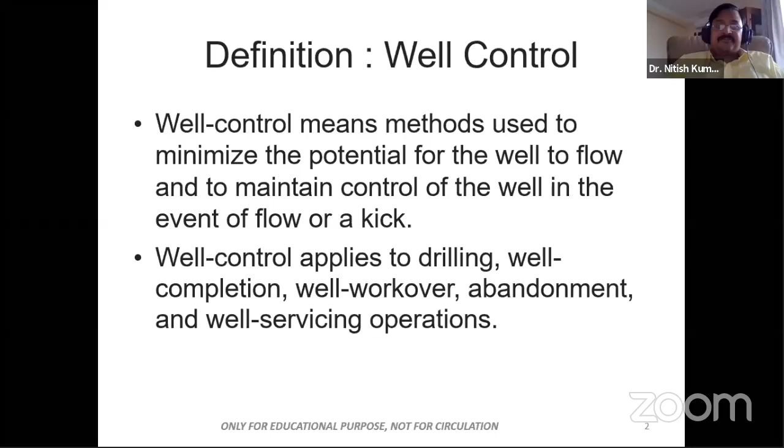All right, guys, so let us start the presentation with porosity and permeability. When we talk about flow in the formation, basically we're talking about two things. One is your porosity, which is the pore space, empty space in the rock matrix. That is empty space over the total space in terms of volume, and a good porosity, like a good sandstone in the Gulf of Mexico or Berea sandstone, might have a Darcy in permeability. Darcy is its measuring unit.

Porosity is purely by percentage, but when you talk about permeability, the unit is Darcy, and flow is in the pore spaces which are connected. Connected means they have the ability to flow from one pore to another, and that is measured in Darcies or millidarcies.

In Gulf of Mexico, one Darcy is not a big surprise for that kind of sandstone. But in the KG Basin, offshore India, you're talking about a couple of millidarcies. So which one will flow more, a Darcy or a millidarcy? Obviously it's the millidarcy which will not flow, so it's not a good reservoir rock.

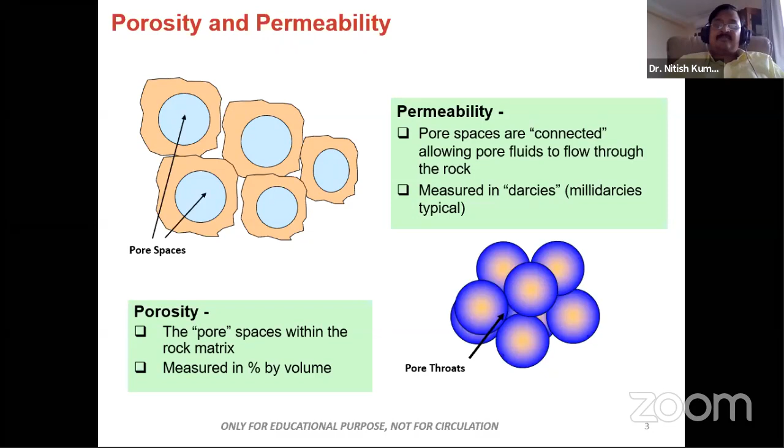Overburden effect. What is overburden? It is simply the pressure exerted on the formation at a given depth due to the total weight of rock and fluids above that depth. You can have very high overburden stresses because as you go deeper, the total weight of rock above that depth is much more than at shallow depths.

If you're talking about wells in Gulf of Mexico, where depth can be as high as 25,000, 30,000, 33,000, or 35,000 feet, you will have much higher overburden stress. But if you go to Malaysia, where wells are comparatively shallower, or North Sea, Norwegian continental shelf, 10,000 to 15,000 feet wells, the overburden stress won't be as high.

So you measure the density of the formation in terms of specific gravity, and also you can talk about it in PPG. Usually we talk about pore pressure in terms of PPG. That equivalent overburden stress for the rock can be almost 19 to 21 PPG.

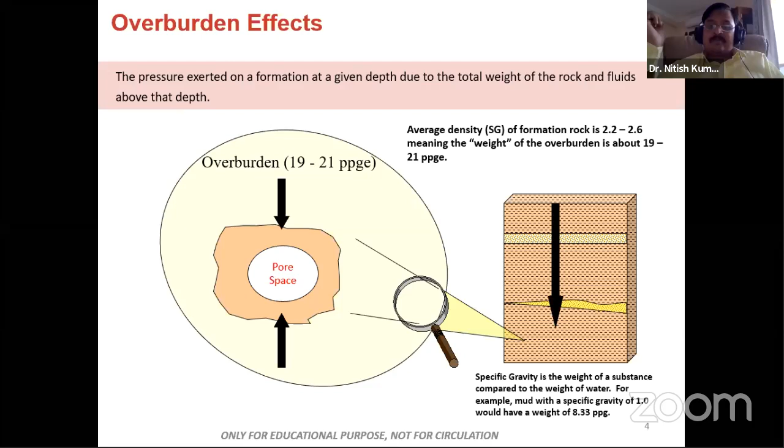Moving forward, let's talk about pore pressure. It is the pressure of the naturally occurring fluids within the earth. What causes a rock to have all that pore pressure? There is a rock, and if it's a reservoir rock, there would always be some kind of containment to that rock. But it is the overburden load on the reservoir which really holds that fluid inside the rock.

So you can have three different kinds of pressures for the rock fluid. One is the normal formation pressure, which is simply the water present in marine or seawater environment to that depth. So if you're talking about seawater weight of say 8.3, 8.33 ppg, to a depth of 10,000 feet, into 0.052, into 10,000, whatever it is, that's the normal pressure.

That is normal. Then there is a category of subnormal formation pressure, which is pressure that is less than the corresponding pore fluid hydrostatic pressure. Why would you have subnormal pressure? There are many situations, and there are reservoirs worldwide where you can have subnormal formation pressure, 6 ppg, 5 ppg, that kind of reservoir pressure have been seen.

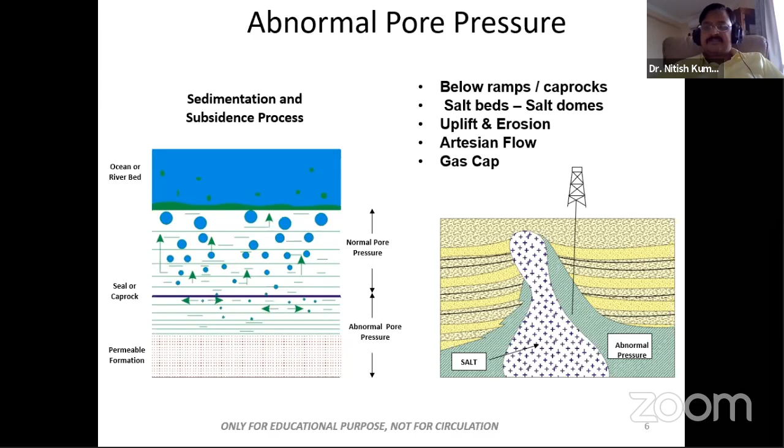All right, next is levels of well control. So what happens if there is a flow of reservoir fluid to the surface, like we said? And how many levels of well control would we have?

The first thing is the primary control, which is the mud itself, the drilling mud. As long as you have the drilling mud in the right way, with the right properties, you have the best well control fluid as the means for the well. That's what we call prevention.

And once this prevention is lost, you go underbalance, and the formation pressure becomes more than the hydrostatic plus the frictional pressure in the well. Then you will go underbalanced, and in that case you may need secondary well control.

And what is that? Something like the BOP rams, or the annular - you shut them in, and then you circulate out that kick, and you try to maintain your primary mud weight. If you're using the driller's method, maybe two circulations, or the wait-and-weight method, whatever method you use, you try to bring that overbalance back and get into the primary control zone.

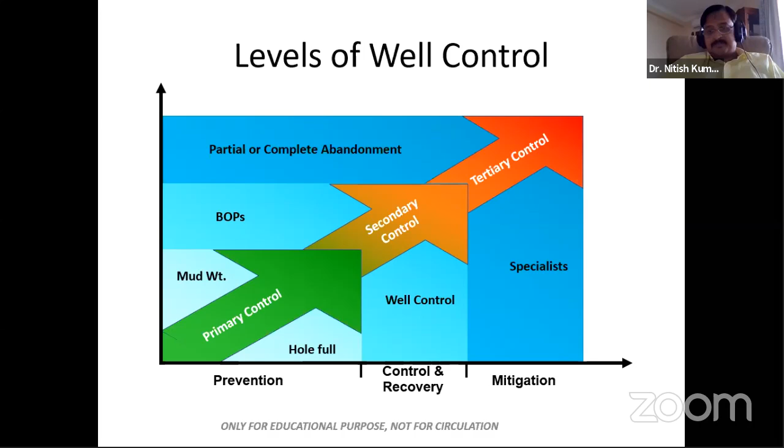Now I'll bring in a slide on well integrity and well barriers. The reason I bring in this topic is that well integrity is a very detailed subject, and those in the field do realize that when they put together drilling programs, we try to maintain at least two barriers, two well barriers in place, and the well barrier is made of various barrier elements.

Now you can see in this schematic there's a reservoir, and we are having a directional sort of well here. So there is the reservoir, and to some extent this casing is a barrier, but as it comes out of the reservoir in the hole, this blue casing is your primary barrier.

And as you go further up, you see another barrier. This is the red one, the cement behind in the hole, and that's the secondary barrier. Further up, you have this cement all around, and you have your BOP, your well control equipment as your barrier element, and together all this is your secondary barrier.

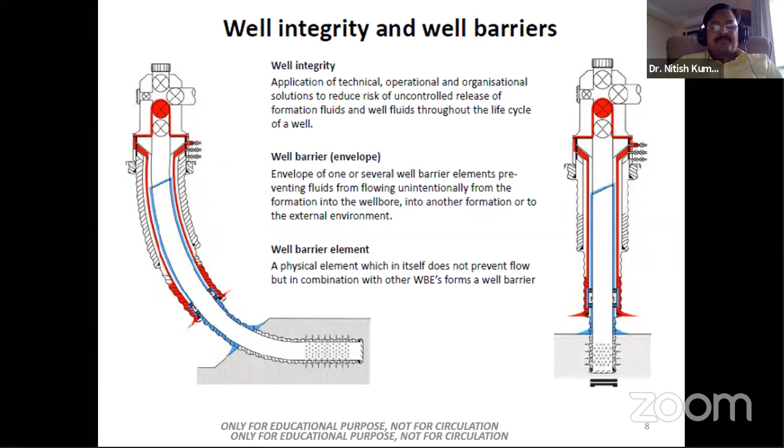Now, why I said initially - there are special situations when you would allow the same barrier element to act as the primary as well as secondary barrier element. This is more in the completion phase, where there are whole detailed analyses and studies in this area of integrity. Here we'll just touch on it from the perspective of drilling, and we're talking about drilling mud basically. So my next slide is about barrier element acceptance criteria.

Now, fluid column - as you know, fluid column is a basic barrier element. This is coming from NORSOK D-10. When we talk about drilling fluid and drilling mud, you see design and construction selection. So in the design phase itself, you must ensure your well design is such that the hydrostatic pressure shall at all times be equal to the estimated or measured pore reservoir pressure. That's exactly what we plan as drilling engineers. We try to have a safety factor there, but as engineers, we can only plan, guys.

When we go in the field, and we drill with a specific hydrostatic pressure, and we hit a big ramp which we had not been able to predict geologically - what would happen? We'll end up in a well control situation because we are going to take a kick. Once you have taken a kick, that is the purpose of the discussion for this presentation.

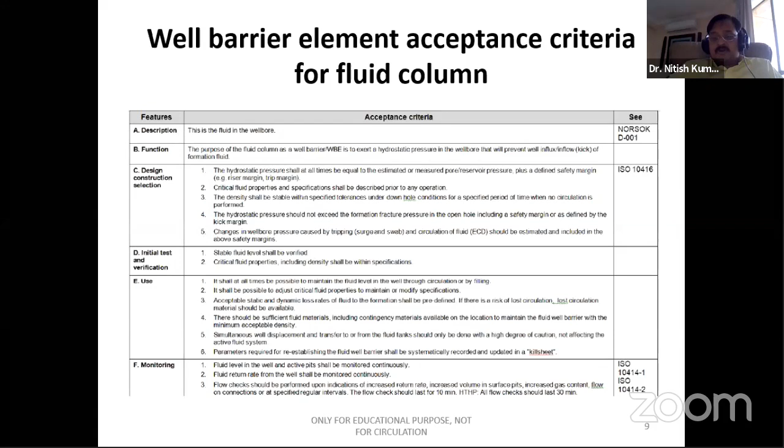Moving forward, guys, so we talked about swab pressures. So what is swab? It's a piston effect when you're tripping, trying to pull your bit out of the hole. This causes a decrease in the well pressure, and if that decrease is significant, what can happen? You may end up in a situation when the reservoir fluid will start flowing.

Now, if the reservoir fluid influx happens, you have taken a kick, and that's something we don't want to happen in drilling operations. But you will see that in theory, to discuss swab pressure or surge pressure, I'll discuss that as well. But this is very important.

From swab and surge pressure perspective, I would say that the operators on the rig side must be aware of the impact. We'll see in one of the well cases how careless we can be in situations.

So, talking about surge pressure, it is the piston effect of downward pipe movement. When you're going down, this piston effect happens on the wellbore, and if you don't have control on the surge pressure, you can end up fracturing the formation. At one end, you can take an influx, and on the other hand, it can be fracturing the formation.

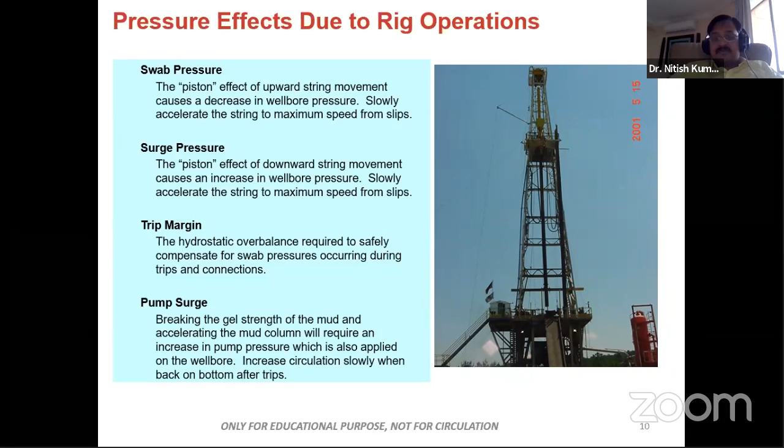So if you increase the circulation slowly, then you have better control on the pressure. Otherwise, you can break something down with the pumps. I will give you an example of this.

So what's happening here, guys? Just have a quick look. Your formation fracture pressure is at 5400 psi and pore pressure 4500 psi. So your bottom hole pressure should really be between 5400 and 4500. Now, what's happening? There are two cases here.

Let's talk about swab, and let's talk about surge. So for swab, you start pulling the bit, and when you're pulling, it runs very close to the formation pressure. What can happen? You can take an influx.

But on the other hand, you are trying to go in the hole with a lot of force, a lot of pressure. What will happen? The well will surge, and then you're getting close to the formation fracture pressure. In both cases, you have one outcome.

Now, in the swab case, when you were trying to pull the pipe out of the hole near formation pressure, what would happen if you switch off the pumps? The additional pressure from the pumps is also gone there, so you will lose pressure as well.

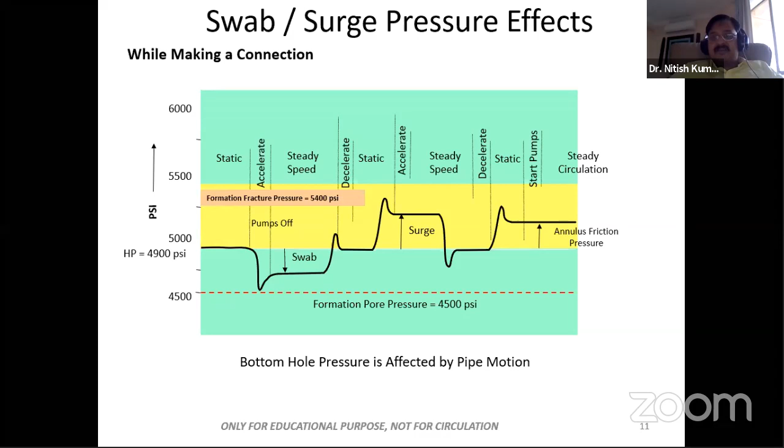Okay, so what is a kick? It's an unwanted or uncontrolled flow of formation fluid into the well. Uncontrolled flow refers to flow when... that's bad, right?

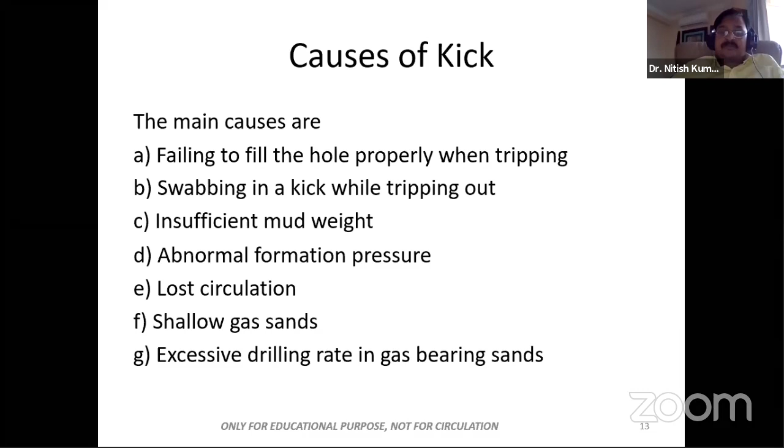Excessive drilling rate in gas-bearing sands. So you get all this drilling rate. There are D-exponent components, all kinds of equations based on your resistivity logs and whatnot, and they will give you a drilling rate, and there can be a drilling rate associated with it, which can be identified. These can be the causes of the kick.

How many kinds of kick indicators do you have? You have positive indicators when the kick is in progress, when you're drilling, or you have signs of approaching balance, underbalance. So let's discuss quickly these during drilling and during tripping indications that a kick would show.

Note that when the flow rate increases, that's a definite indication of a kick. When pit volume increases, that's a definite indication of a kick. Pump pressure decreases, pump stroke increases — note this. Pump pressure decreases, not increases. Pump pressure decreases and pump stroke increases, you will have a kick. So these are definite situations you can face. There are several IWCF questions based on very basic understanding of indications of a kick. When the pump pressure decreases and stroke increases, you have a definite kick.

While you are tripping: incorrect hole fill volume. Why would that happen? You will have an incorrect hole fill volume if there is influx. If there is influx, what would happen? The well will start flowing. Hole keeps flowing between stands. So you're trying to make up connections and the hole is flowing. What does that indicate? It is a definite sign of a kick in progress. And this is when you're running in.

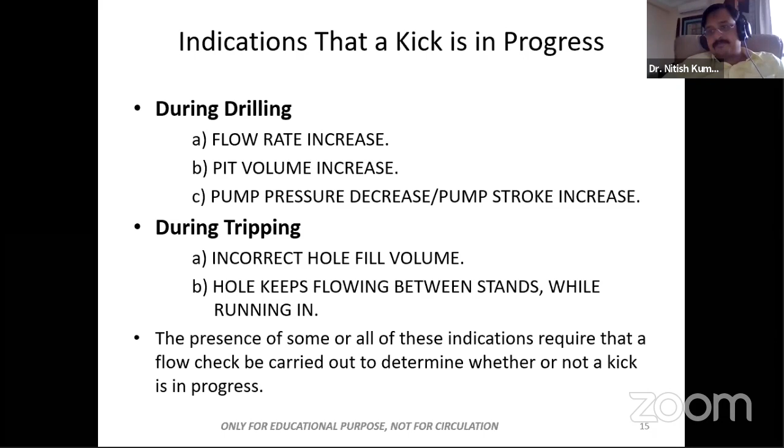Presence of some or all of these indications requires the flow check to be carried out. So guys, what is our solution? If we have a positive indication of a kick, what is the solution? What should be the first thing a drilling supervisor or a driller should do? You should stop drilling and you should go for a flow check. But I'll give you examples and you will see they didn't do a flow check, or they did a flow check when it was not required. We'll talk about those.

So talking about indications of approaching balance. When you say approaching balance, guys, or rising formation pressure, that means the kick has not really taken place as yet. The kick is not in progress, but a kick can happen if you do not take preventive measures.

Drilling rate — if there is a drilling rate, that means the formation is changing. Like we said earlier, a drilling rate is very useful to identify change in formation and is usually associated with change in gas, background gas, total gas.

Torque and drag, fill on connections. Well, what does it mean? What would happen if you go underbalanced? You will take a kick when you go underbalanced, right? So what would happen if you go underbalanced, and if there is a shale formation around you? Because the shale has that property of taking the water content from the mud, it will start swelling and it will behave erratically. It doesn't have enough overpressure to counter it, and then you will see that the torque and drag will increase.

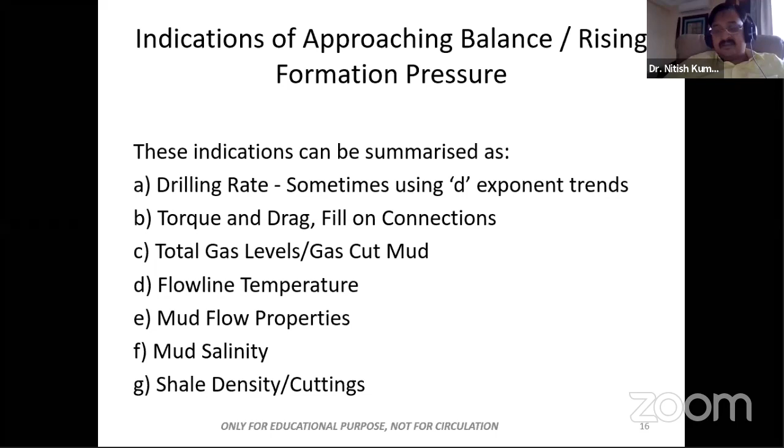Shale density, cuttings, cutting sizes - sharp cuttings versus what kind of density of shale you get. All these are just defined as indications of rising formation pressure.

All right guys, so you know what a kick is. You know now that you have taken a kick, what is your option? Your option is you have to kill the well, right? How are you gonna kill the well?

Basically, most methods try to put constant bottom hole pressure, and here we will discuss driller's method and wait and weight method. There are many other methods, not many, but two or three more methods - circulation is one, and you can strip down if you need to. But over here we are just talking about the very basic ones, driller's method and wait and weight method.

The principle, if you think of the well as a U-tube, is that formation pressure you want to keep constant is the sum of hydrostatic pressure of mud in the drill pipe. It's important that the pressure is measured on the drill pipe side. Why? Because the drill pipe side fluid will not be contaminated, right? Plus the shut-in drill pipe pressure - that makes your formation pressure.

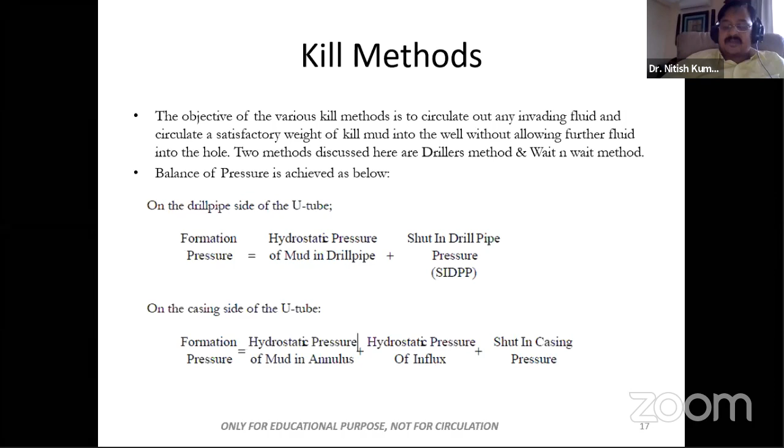On the casing side of the U-tube, what do you have? You have hydrostatic pressure of mud in the annulus, which would be of lower density than what you had in the drill pipe, plus the hydrostatic pressure of influx, whatever influx you have taken, plus the shut-in casing pressure. So you can come up with the formula for kill mud weight based on these two concepts, and we can skip that for now. I will just go and talk about driller's method and wait and weight method.

So the best part of driller's method is circulation begins immediately. The first thing is let the influx be circulated out of the well with original fluid weight. The initial circulation pressure must be held constant during the first circulation.

Then for underbalanced kicks, a second circulation is required. Why? You will need to know the kill mud weight and then circulate it around the well so that you can get the original well control, the primary well control, with the drilling mud. And if there is a mechanically induced kick, then you don't really need a second circulation using a driller's method.

So what is the good thing about driller's method? Immediate circulation, and the barite supply is not required to begin the procedure. You don't have to wait for anything, you just go and start your circulation.

Disadvantage: what would happen when you circulate with an underbalanced mud for a long time? There is influx pressure, and there would be a second round of circulation with the kill weight fluid, and that means the well will be under pressure for a longer time on choke. That's a disadvantage, right?

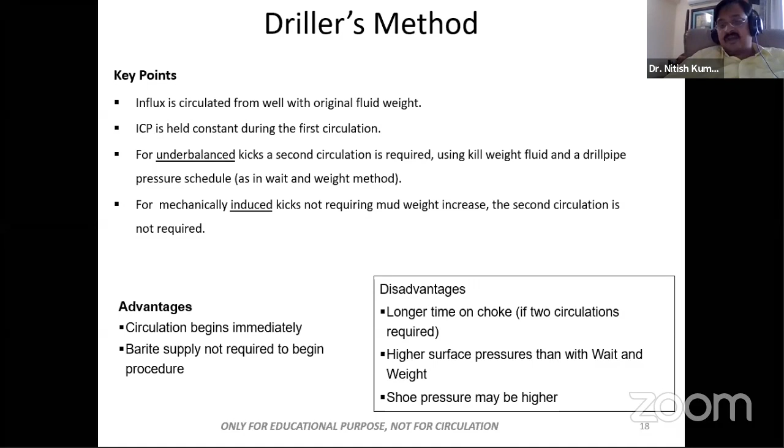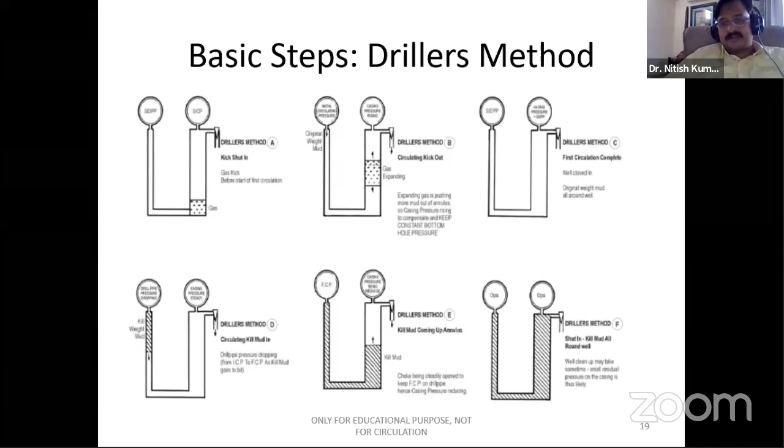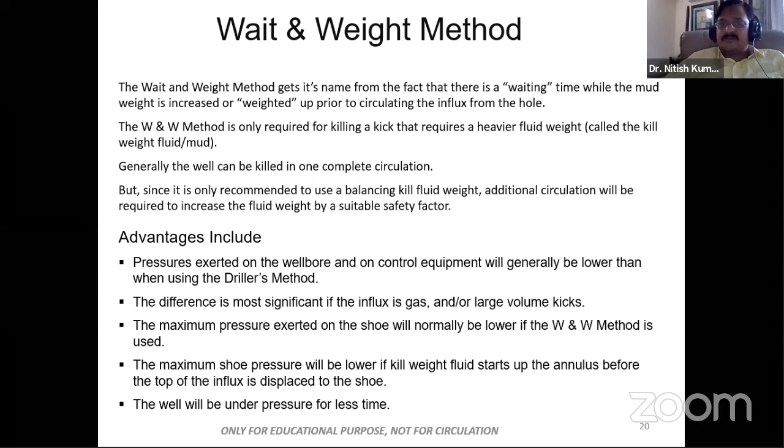All this is basic concepts, guys, no big concept. I'm sure you're aware of the driller's and wait and weight methods. Now let's talk about well control incidents.

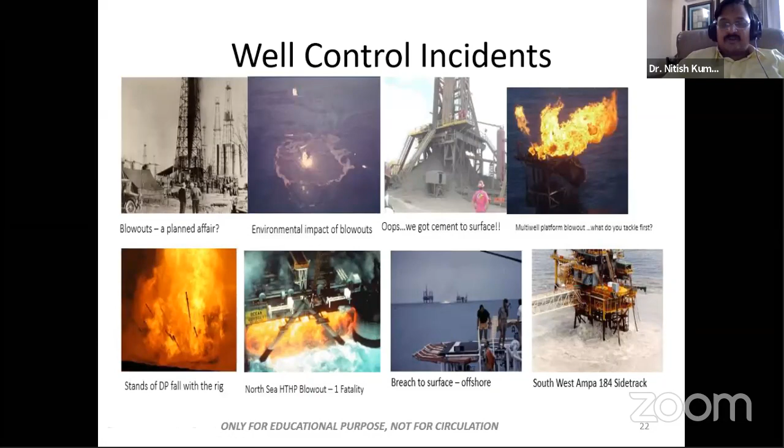Well control incidents happen, guys, and this is the reality of the oil field. We need to be very careful in our designs. Good engineering decisions on the rig side - only then can these incidents at least be prevented from happening.

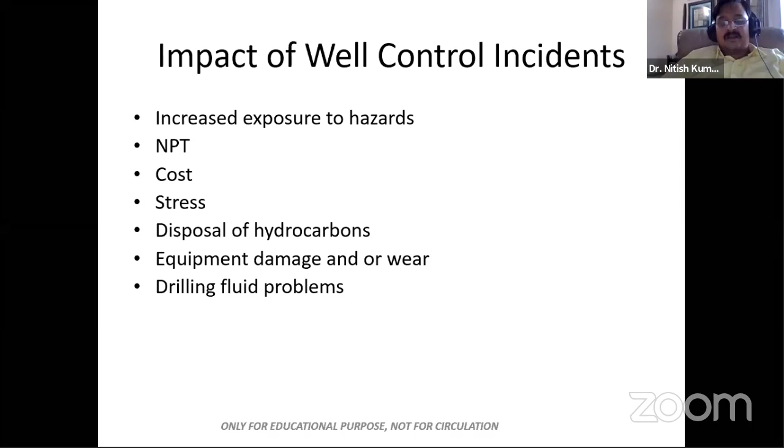So what are the impacts? Increased exposure to hazards, NPT costs - you know all this, I'm not going to waste time here. I'm told I have 1.5 hours only, and 45 minutes is gone already.

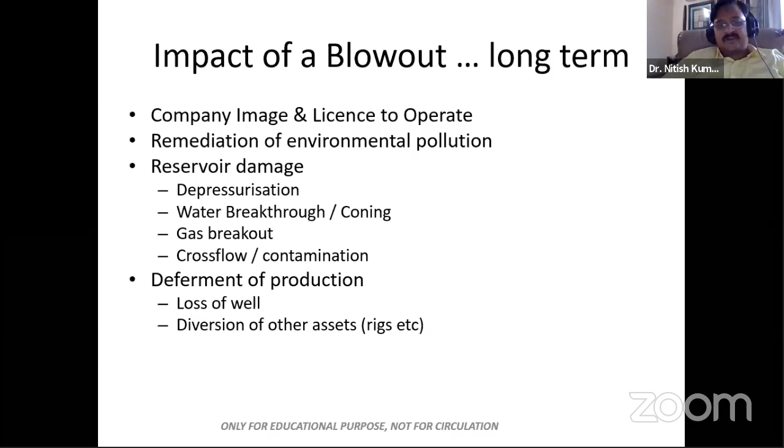So impact of a blowout: long term company image at risk, remediation, environmental pollution, reservoir damage - you depressurize the reservoir, whatever - deferment of production, loss of well, etc.

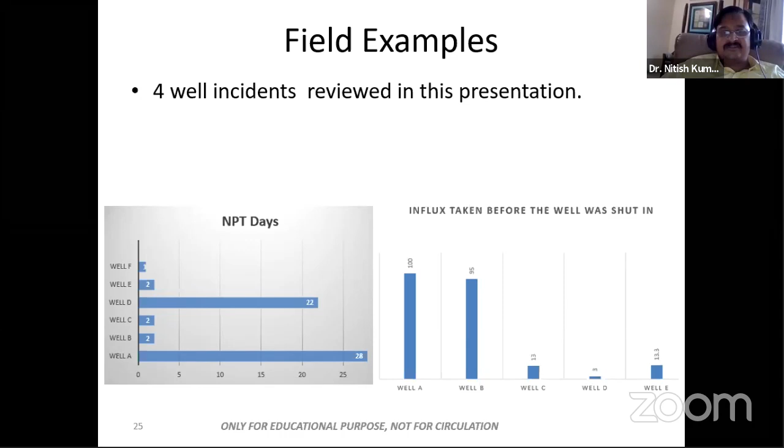Whereas on others you had just 3 barrels and you were able to shut in like this. So you need to have very agile minds. You need people on the rig who are able to take quick decisions, understand the well, talk to the well, and make the right decisions at the right time.

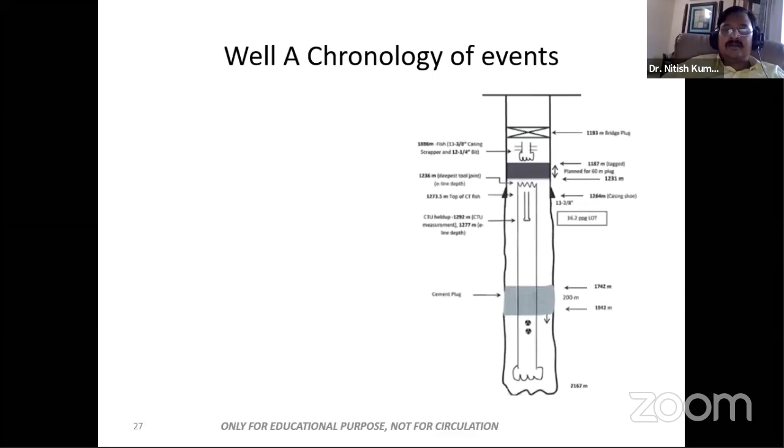Let's go to the well and the different situations we run into. So this is well A - I just named it, the operator is not identified. Here is a well, 2167 meter TD, and we were drilling in MPD mode.

For those of you who don't understand MPD, it's managed pressure drilling. It's just one way to have better control over the bottom hole pressure. The main purpose when talking about a kick is to have good control on the bottom hole pressure - this tool really helps us.

Just like you will have a pump on the rig, the MPD also has its own pump, and it puts an additional pressure on the well, and by that it minutely controls the pressure on the bottom hole. We were drilling a 12 and a quarter inch hole, with 11 ppg synthetic mud at the depth of 2151 meters. Now you observe the circulating background gas increase from 0.1 to 1.8.

Now guys, what does that mean? If you are observing an increase in background gas, is it really a confirmed sign of taking a kick? No. We know that this means the pore pressure is increasing, right? From 0.1 to 1.8, you definitely need to start observing the well.

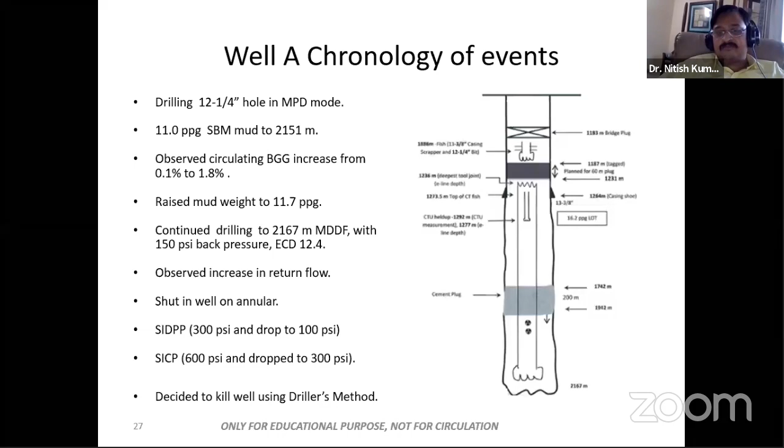So what is our observation? Increase in connection and background gas was observed. The well was not flow checked. Didn't I tell you the first thing you should do is flow check the well?

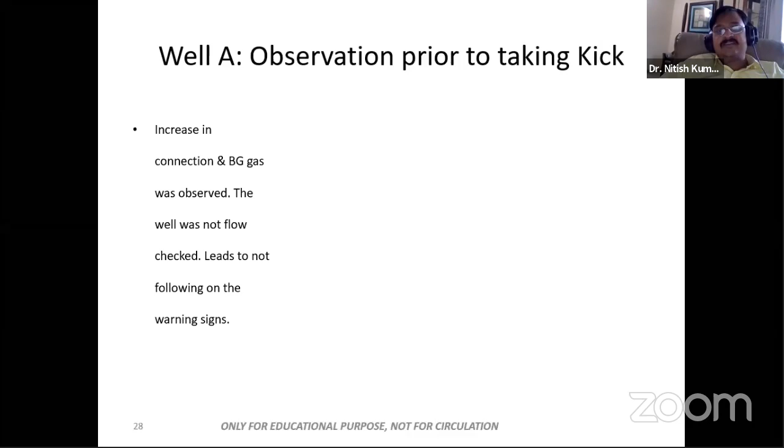This leads to not following the warning sign. So who didn't follow the warning sign? The guys on the rig didn't follow the warning sign. And they are all IWCF qualified, right? So despite having all the qualification, they were not really looking at the connection and bottom background gas.

It's like saying, it's okay, we will just drill a little more and we'll case off. Hey, that doesn't happen. You have a warning sign, stop right there and flow check.

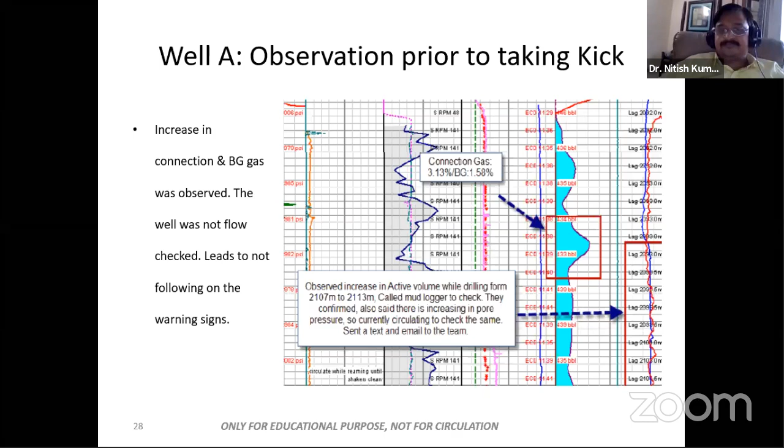First of all, if you keep running and increase the back pressure from MPD, you will see an increase in flow, because what goes in comes out on the other end, right? And you keep your pumps on. What will happen? If you keep going on, it will reach a point where you're going to fracture the formation. And if you fracture it, then an influx will begin.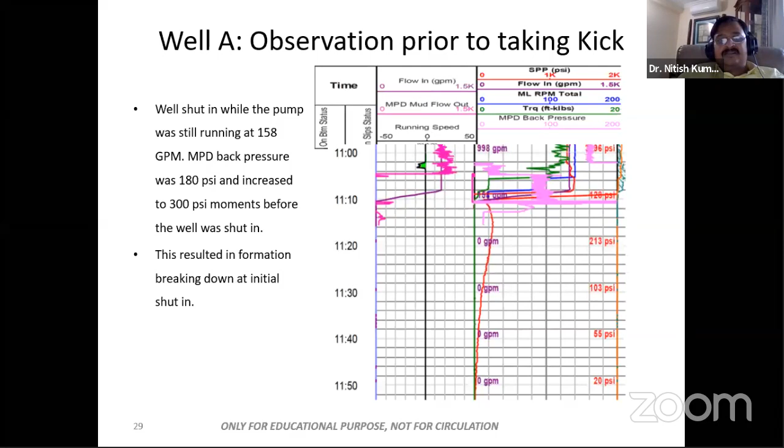What does that mean? You're causing trouble to yourself. Why do you have to keep your pumps on? This resulted in the formation breaking down at initial shut-in.

Look at it, guys. MPD pressure was not maintained during the connection prior to the kick. It was not maintained, you increased it from 180 to 300 psi. Any specialist on managed pressure drilling will tell you that you should maintain the back pressure constant if you are in a connection mode or drilling mode. You don't want to change the back pressure.

There's no mention of increase in flow back at this time. If you increase the back pressure, there should have been an increase in the flow back. What does that mean? If there is no mention of increase in flow back, that means you are losing fluid somewhere, and when you're losing it, that means you're losing into the formation.

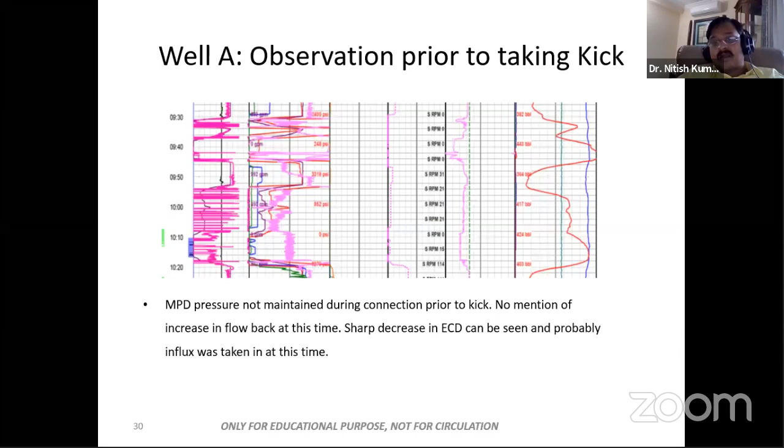The sharp decrease in ECD can be seen, you can see it on the graph, and probably influx was taken at this time. See, this is how we mess up on the rigs. Managed pressure drilling - if you're using that, you must know the basic principles of how you run the show for MPD systems.

How was it handled? There was another thing we observed. We pumped 34 barrels, 11.7 ppg, at 30 SPM, with no response on shutting. So what he did, he increased the strokes. He said, okay, not 30 SPM, let's do it with 35 SPM. God damn, don't you know that in a driller's method, during the first circulation, you're not supposed to change your SPM?

That rate shouldn't be changed, but they changed the pump rate. So if you change the kill rate and you hope that the kick has been circulated up, I'm sorry, that's not going to happen.

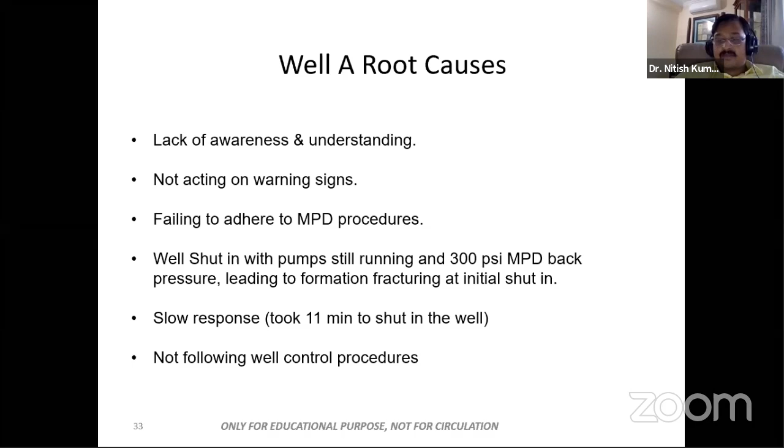Now we will discuss 3 to 4 wells today, and you will see that the root causes, the conclusions, and the lessons learned are very similar on the wells where we took the kick. There have been studies on various kicks globally by different well control companies, and very similar results have been observed. So we often blame Mother Nature, but as engineers and operations personnel on the rig side, there's a lot we can do to make our working environment safe. And that's why this presentation is important.

Okay, well B. Drilling an 8.5-inch hole at 3314 meters in MPD mode. Mud weight 17.7, back pressure EMW with MPD 18.1, while making a connection. Okay, we observe an increase in flow out and active pit.

So, well, increase in flow out and active pit. Guys, just throwing around this thing at this time - could this be a ballooning event? Now, for my college students, I will explain what ballooning is.

Ballooning is nothing but the formation takes in some of the mud, and when you shut the pumps off, it gives you back the mud. So initially you think that you're losing mud, just like in a lost circulation scenario. But when you switch off the pump, this mud comes back in the hole, and that action makes you think this is a kick.

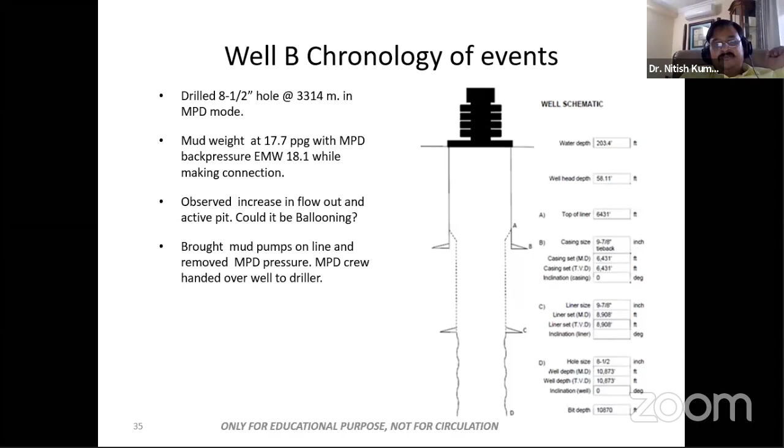What, mud pumps online? So, remove the MPD pressure, MPD crew hand over the well to the driller, shut in on BOP, observe return flow and active increase, continuous increase, all right. And then you quickly shut in the well on annular and observe drill pipe pressure of 220 psi and shut-in casing pressure of 650 psi. You see the difference? Almost 400 psi, 430 psi difference.

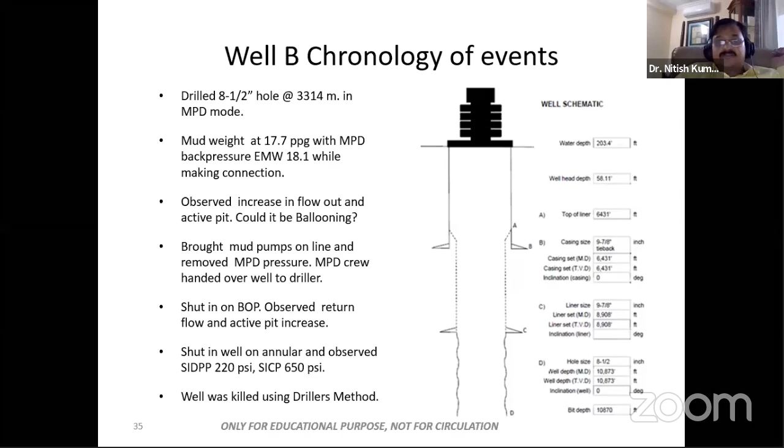Could pumps on and off lead to 430 psi? I would doubt it. Anyway, let's go ahead. So they used the driller's method on this, and what we see here is that warning signs were not followed - drilling breaks occurred during the day, 2 hours before the kick even happened. There were drilling breaks, so the formation was changing, but nobody bothered to have a flow check.

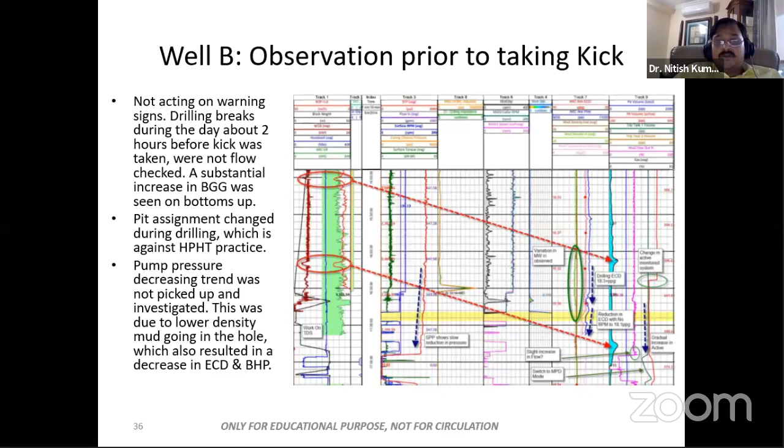Now you see the pressure going down - the pump pressure has been decreasing significantly over a period of 2 to 3 hours maybe, while they have been drilling all this time, and that trend was not picked up nor investigated. So we're saying lower density mud going in the hole. Now, just before that, we said there was a drilling break - if there is a drilling break, obviously the gas is going to increase. That means you're going to have gas-cut mud going in the hole, which will reduce the bottom hole pressure.

So none of that was identified. You see how failures happen. It's not just one reason for the kick. There are so many things here which were not identified.

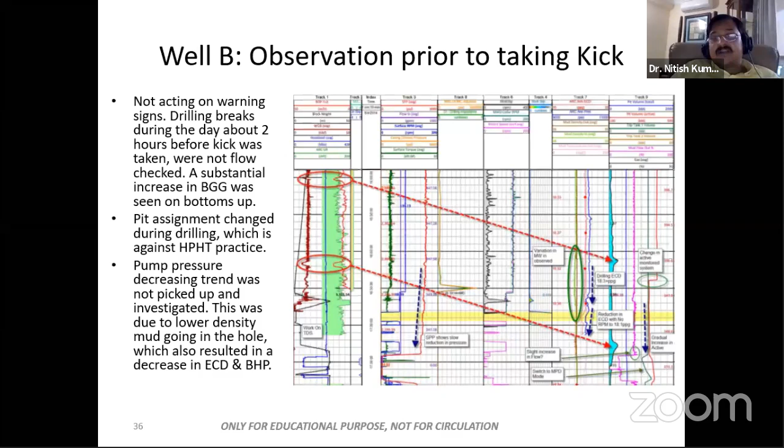Then how was the incident handled? Well, it was killed using driller's method, initial circulating pressure. The slow rate circulating pressure, they had that number, and then that is 630 psi.

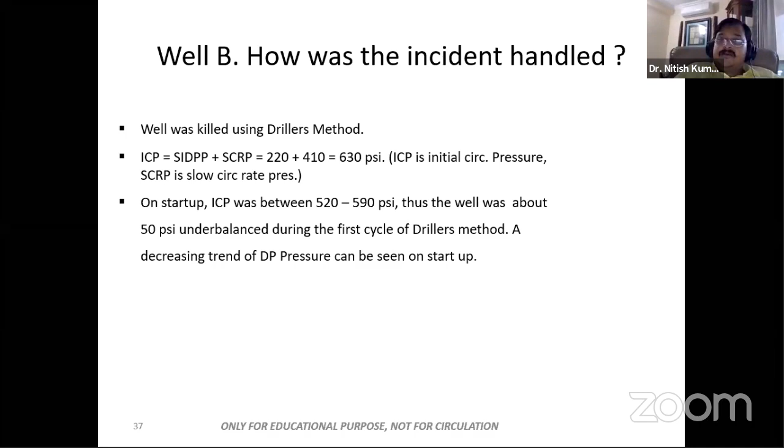But it was observed that the initial circulating pressure was way below the ICP, even to start with. So you are below ICP, and that in itself is a big problem. Why? Because that's a requirement for a driller's method. You must be at ICP to start with.

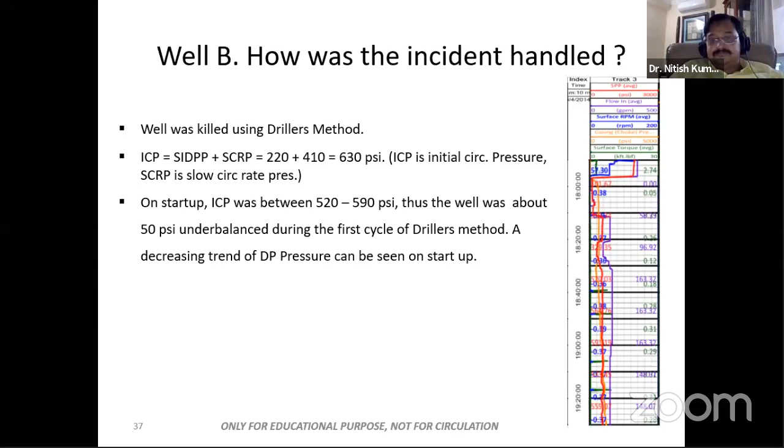Then you see they had different flow rates, 148 GPM versus 163, corresponding to different strokes per minute, 30 and 32. So they were changing the flow rate all the time. Now you don't play with that.

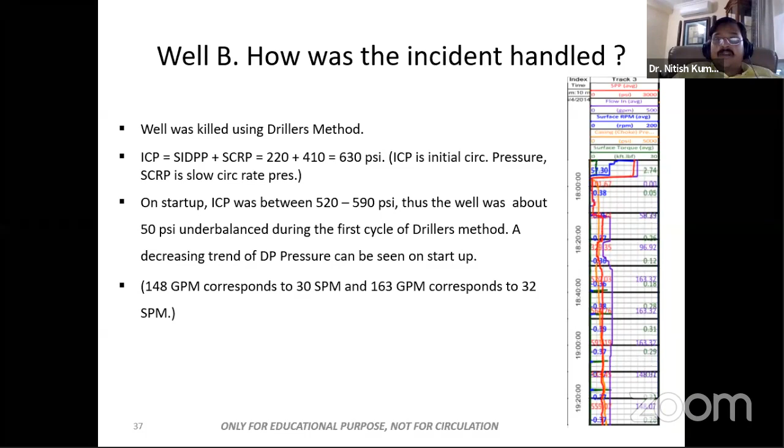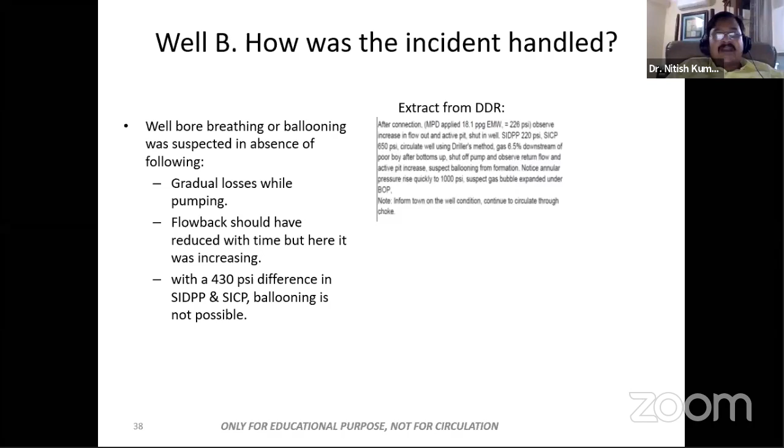So here you see wellbore breathing or ballooning was suspected. Oh gosh, yeah, big scientists on the rig, guys. Gradual loss while pumping. Flowback should have reduced with time, but here it was increasing. Didn't we say that in the very beginning? And throughout the process, we saw that flowback was increasing. If flowback is increasing, why should somebody think of it as ballooning?

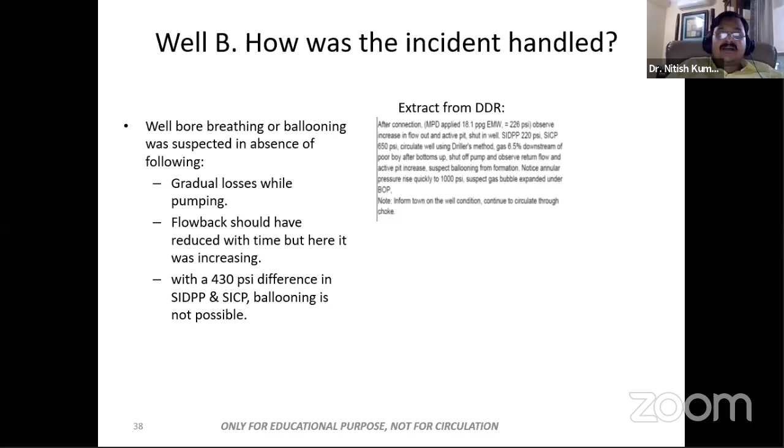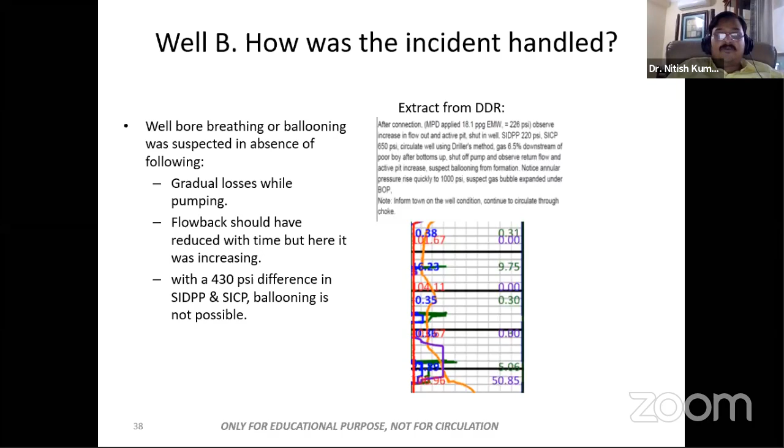And then you see 430 psi difference in shut-in drill pipe pressure and shut-in casing pressure, and you're thinking it's a ballooning effect. So what's the root cause? Lack of awareness and understanding. Not understanding difference between kick and ballooning. So even though you may have IWCF certificate, that doesn't mean you understand the difference between kick and ballooning.

Not applying proven well-control principles while killing. Drill pipe pressure not held constant during first cycle of driller's method. ICP incorrect, 50 psi less than what it should have been, resulting in more influx during first cycle of driller's method. Not acting on warning signs.

This is the first thing. The very first thing you need to say is if you're seeing a drilling break, if you're seeing gas levels go up, if you're seeing a decrease in pump pressure, the first thing is stop. Stop where you are, pull up, pull down, make sure that your bit is in the right place, and flow check.

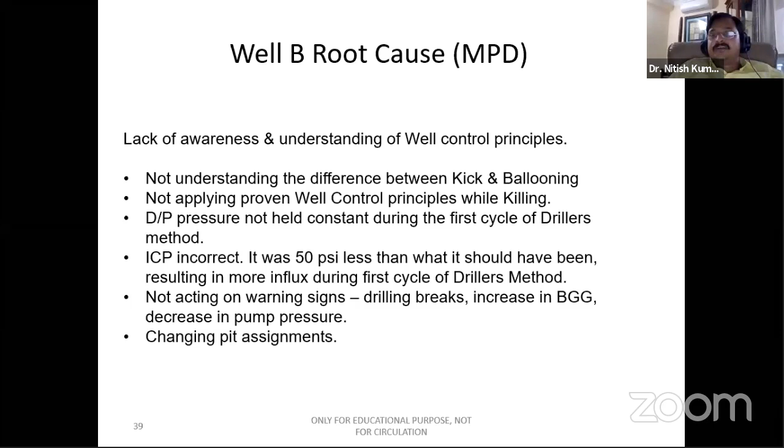Changing pit assignments - don't change people during drilling the hole. Finish that section and then move to the next well.

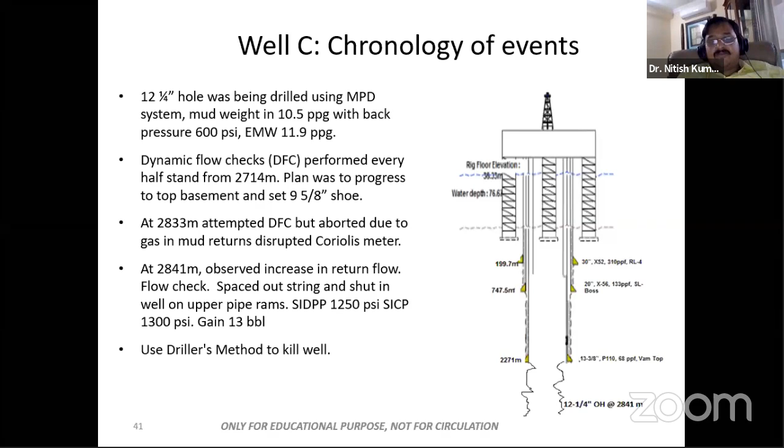Well kicked while drilling, increase in returns was seen by the driller. Okay, so he has seen a confirmation of increase in returns while he was drilling. So he has a confirmation already. So he shuts on the pipe ram.

First cycle of driller's method, the well was shut in on annular. What the hell? Why do you want to change it to annular? If you really wanted to do it right, you should have shut it on annular to start with. Well should have initially been shut in on annular and killed on pipe.

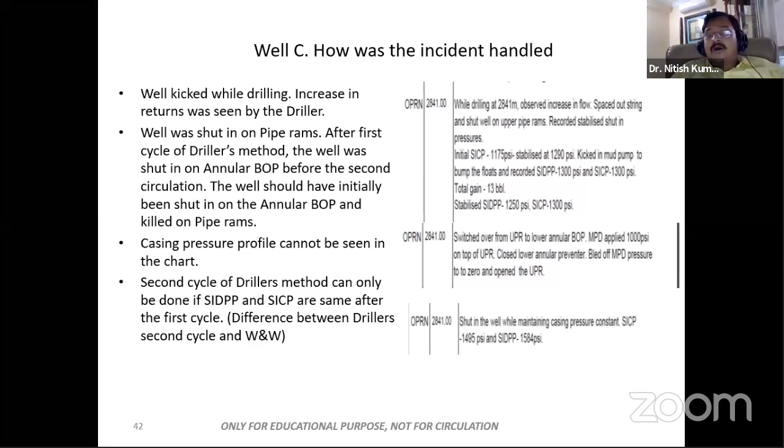Casing pressure profile cannot be seen in the chart - okay, so we didn't add some basic information in the text. Second cycle of driller's method can only be done if drill pipe pressure and casing pressure are the same after the first cycle. So they had a difference between the drill pipe pressure and casing pressure. Now this is not following the very basic knowledge as far as driller's method is concerned. If you circulated out the kick, how can you not have the same pressure?

Improper procedure: flow check on positive indication of a kick. What are people doing on the rig? They are doing a flow check after getting a positive indication of a kick. So what is it that you need to know as a drilling engineer? The first thing you need to know is what are the positive indicators of a kick.

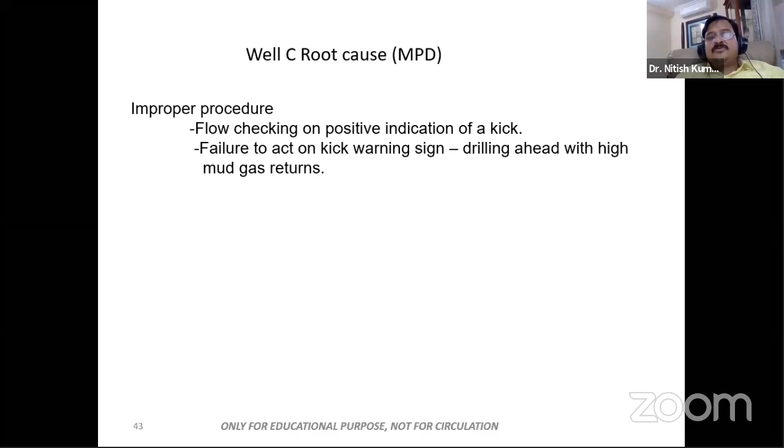Next, failure to act on kick warning signs. This is where you must do a flow check. Drilling ahead with high mud gas returns - they must have kicked. Well shut in on pipe rams, then changed to annular after the first cycle of driller's method.

Underlying causes: lack of understanding on conducting flow check with MPD. Driller's method second cycle applies, whereas wait-and-weight method should have been used. Why? 300 psi back pressure while killing prevented another kick.

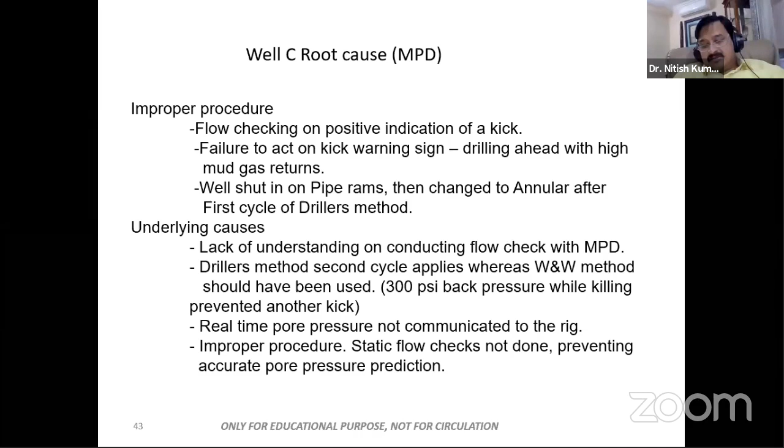Real-time pore pressure not communicated to the rig. Improper procedure: static flow checks not done, preventing accurate pore pressure prediction. So you cannot predict pore pressure. This is a big challenge on the rig. When you're drilling, you really need to know what the pore pressure is.

The best way you can do this is to look at the sensors on the rig and identify, maybe look at the exponent, look at some kind of trending lines, and identify there's an increase in formation pressure. That should be done, and then you do static flow checks when you have MPD on the rig.

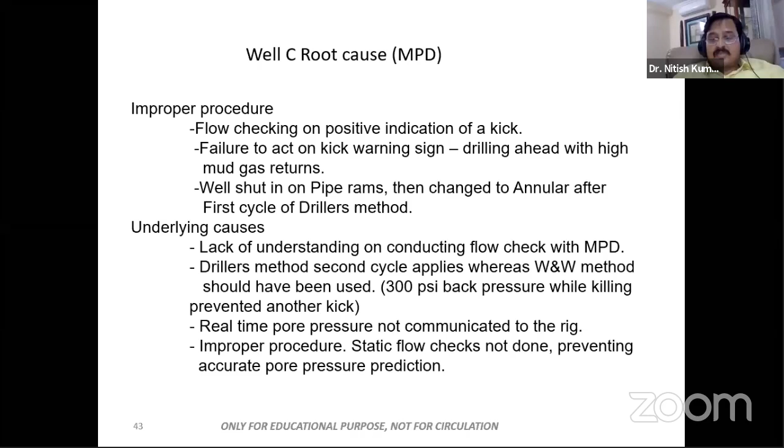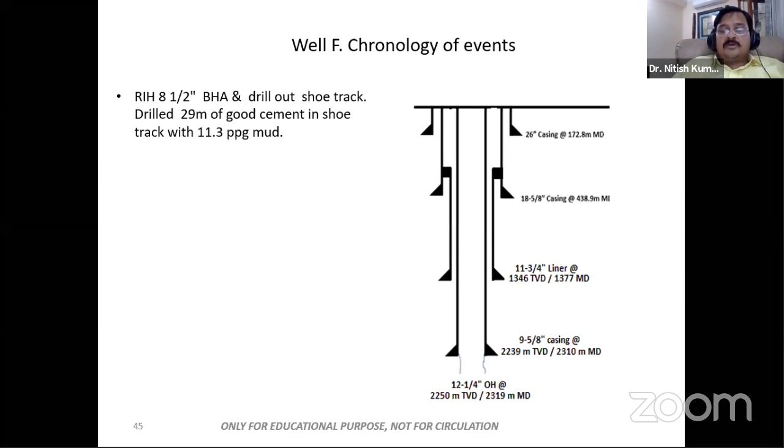Okay, one more well. This is the well, and we are drilling an 8.5 inch hole. Drilled 29 meters in good cement. They are drilling out of hole with 11.3 ppg mud, displaced to 9 ppg reservoir drilling fluid, drilling top plugs, and drilled out remaining shoe track with 9 ppg.

Now look at this: drilled 29 meters of good cement shoe with 11.3 and displaced to 9 ppg. Why? They thought this was good reservoir rock, and since we've already drilled through it, we know the pressure in this rock is 9 ppg. So let's displace the mud in the hole from 11.3 to 9 ppg.

And then what happens? Observed increase in return flow and active system. So from 9 ppg mud, you can't expect to hold a pressure of 11.3, which means this was drilling in virgin formation. Even though it was a proven, producing field, the formation was virgin and it had 11 ppg pressure below the hole.

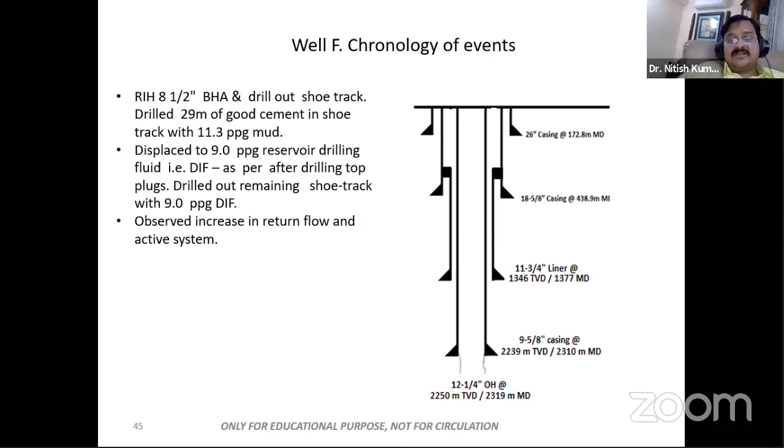So, shut in well with shut-in drill pipe pressure 480 psi, casing pressure 925, 18 barrels, etc. Virgin reservoir pore pressure, which was never mentioned in the drilling program. We failed to identify a virgin reservoir pressure. It happens, but we could have been more careful drilling. Anyway, let's see what they did.

Just before the kick, ECD showing decreasing trend. Mud density out is below 9 ppg at times, even lower. Pit level and return flow started to increase 10 minutes before... casing pressure profile and mud density not available. The well was killed, but timely action was not taken.

Why was timely action not taken? Well, because when the ECD was showing a decreasing trend, that means you're losing pressure somewhere. How would you lose pressure in the bottom hole? That means there is some kind of influx coming in, maybe some salt water there - something reducing your bottom hole pressure. And then pit level and return flow started to increase.

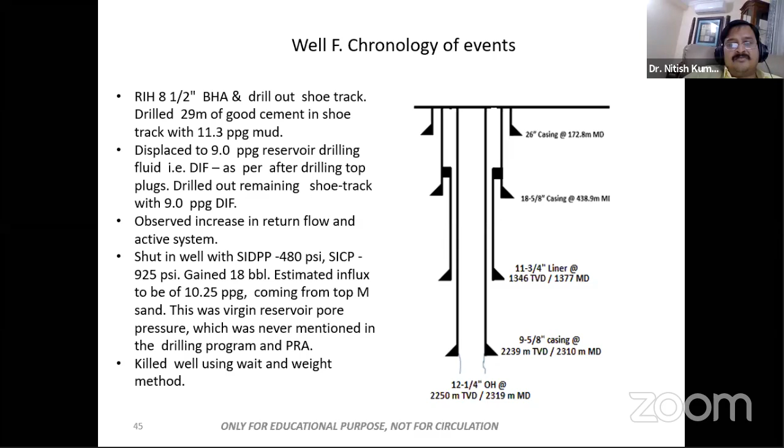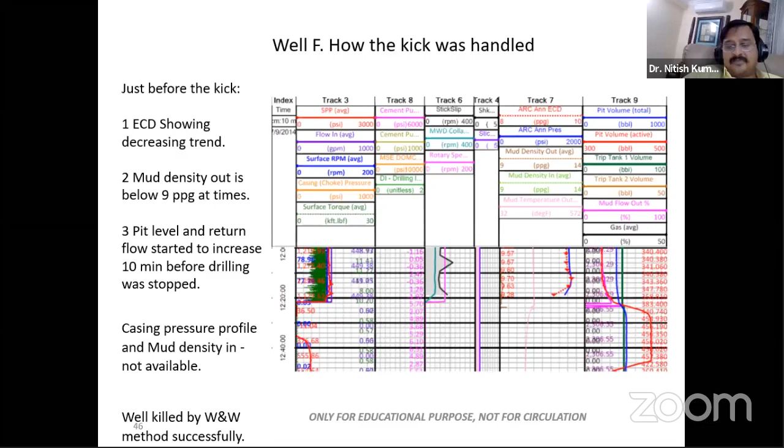So again, this confirms we did not really shut in the well until we saw a return flow in the system, whereas ECD was already showing a decreasing trend. There were differences between in and out. Timely action was not taken - pit level increase and return flow increase started 10 minutes before the well was shut, while ECD was showing a decreasing trend.

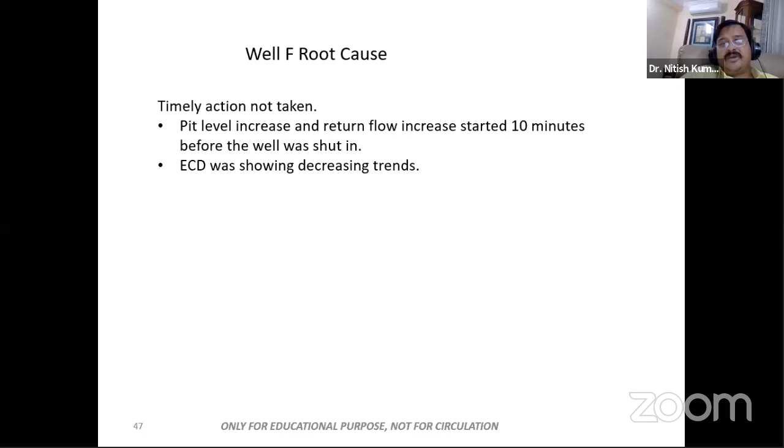Underlying causes: displacement to 9 ppg mud was not done in a controlled manner. Only one barrier - what was that barrier? The cement below in the shoe track. That was it.

The kick in this well was handled in the best manner, amongst all four wells we have seen. Casing pressure profile and mud density profile were not available - this is a common thing.

What are you going to do? You think, I have calculated kill mud weight, and for that I just need to verify pressure - is this enough? No, you need to know what's happening on the casing side. Why? Because the kick is on that side. You need to identify the kick volume, and to identify kick volume, you need to know the pressure on the casing side.

Mud density in profile is not available. So this kind of thing happens.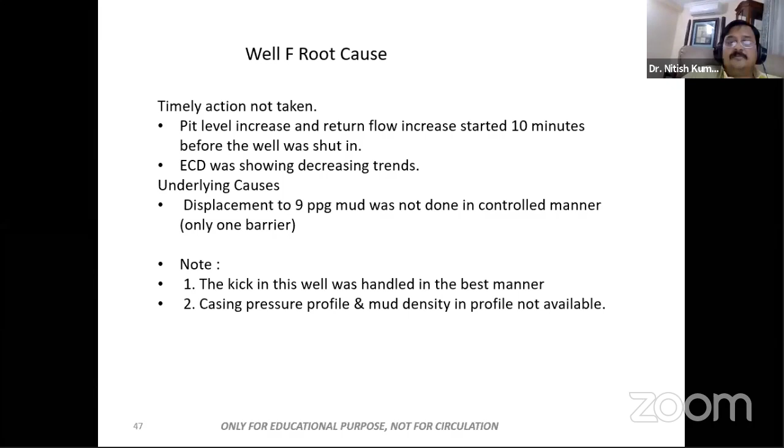Now let's conclude from what we have learned, what we have seen in 4 wells, and also based on your basic kick and well control situation analysis. We can see that accurate pore pressure prediction can help reduce well control issues. That's one big thing we wanted, but we know that it is very much an impossible thing to do, to predict pore pressure ahead for 500 meters below the bit.

But we try to do it by VSP, by different methods, resistivity. At least we can try to find some trends. And the more time we spend on this kind of analysis, the better prepared we are for developing incidents.

So 4 out of 7 wells kick in the ramp, carbonate pressure ramp. So what is a ramp? Where the pressure changes significantly in a very short distance, as we build it.